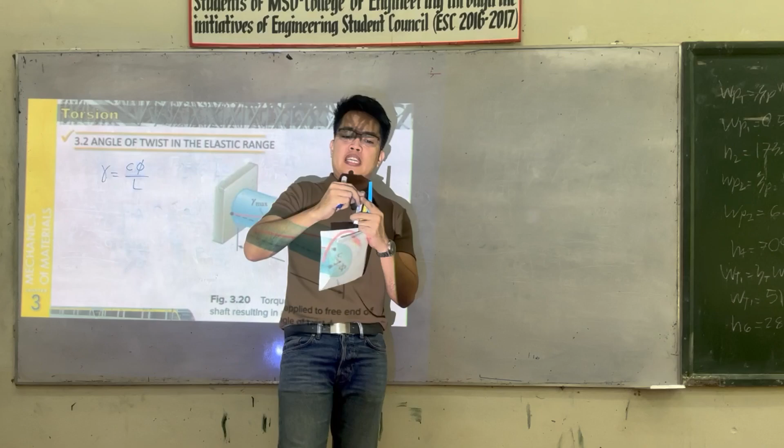Hindi siya lalabas sa proportional limit. Ibig sabihin, meron pa siyang straight line, proportional. Angular twist is just summation of TL over JG. Pag-apply ko ng torque dito, ito siya ay nabuo. Kung ito siya ay unmatched o nakadetach, ano yung pag-twist ko sa taas, ganoon din yung pag-twist dito sa baba. Kanina, problem sir, yung gamitin mong TO ay 560 para hindi lumagpas ng 8,000. Sabi din ng isa, sir, yung gamitin mong TO ay 660 para hindi lumagpas ng 8,000. So ano yung pipiliin mong TO, this one or this one?

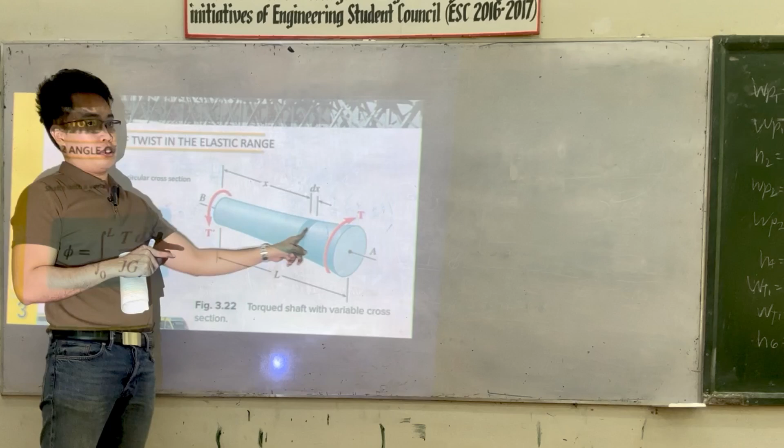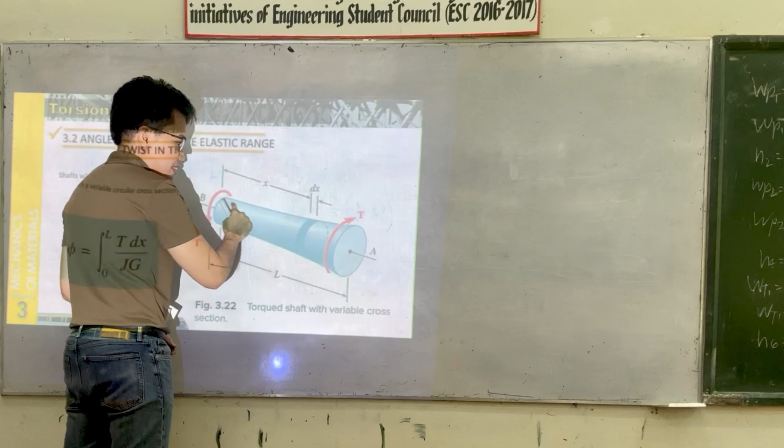Angle of twist in the elastic range. Sample problem 3.3. So far, yung binigay natin na example ay yung mga shaft natin ay circular at straight. Now, paano kung yung shaft natin ay function of x? Kung lalaki nang lalaki yung x natin, somehow yung radius natin dito ay function ng x natin.

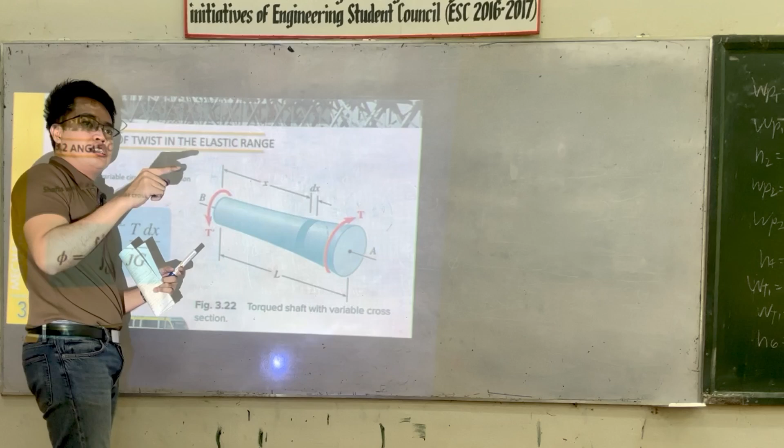So ano yung ginagawa natin dito? Kinakat natin siya into strips. At yung strips natin, instead of TL over JG, yung L natin, instead of length, magiging dx. So yung formula natin magiging T dx over JG. Pero take note, yung J natin dito ay function of x.

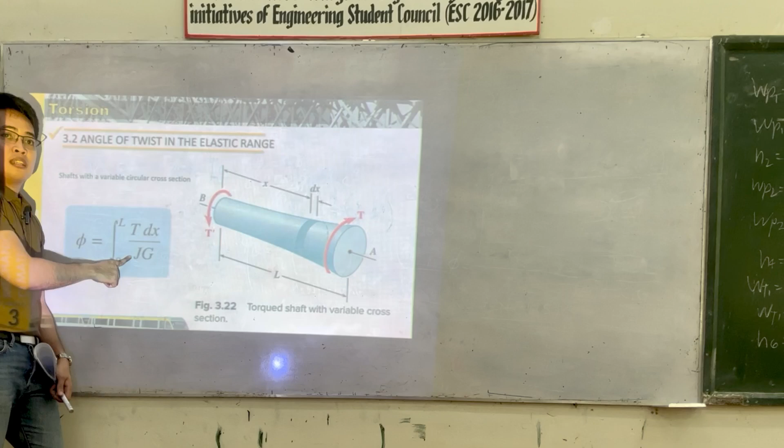Kasi yung J natin dito, ano yung formula? We have pi over 2 times the fourth of the radius, na yung radius natin ay changing with respect sa x natin. So if radius is a function of x, at yung J natin ay function ng radius natin, therefore J is a function of x. So this J here is not constant, it's a function of x. Kung ito ay function of x, hindi natin yan pwedeng mapalabas.

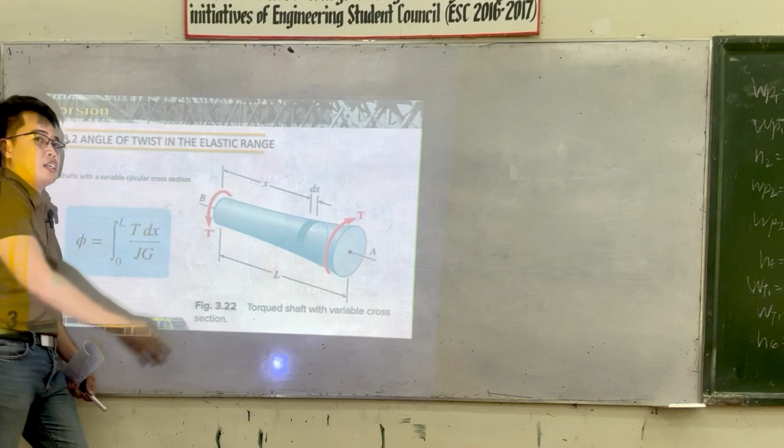So ayan lang, sa mga problems na involving integration, parang math lang ito. Given ka ng function, substitute mo dito, i-integrate mo. Parang math lang ito, calculus. Wala naman halos application yung integration na ganito yung mga shape ng shaft natin. Most of the shaft in real life is straight, so doon tayo mag-focus, sa straight, kasi itong isa ay mas math.

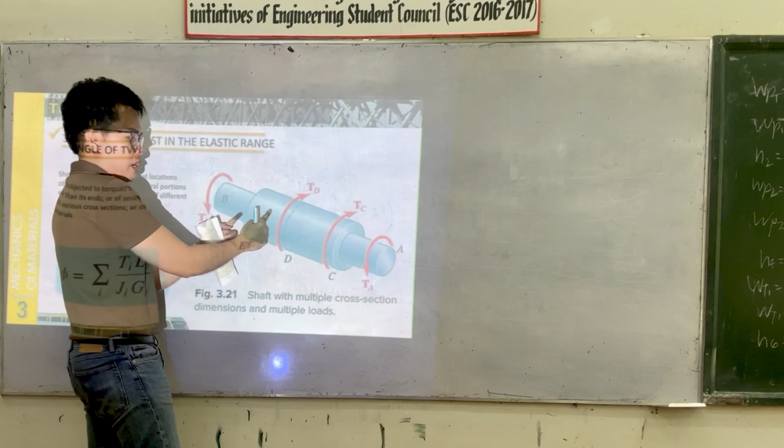Paano mag-integrate? So dito tayo, instead of continuous na graph, let's have it discrete. Paano kung yung shaft mo ay iba-iba yung diameters nila, at merong mga torques of different magnitude applied at different points? Ano yung gagawin mo? If you are asked, what is the angle of twist, if this one here is fixed, tinwist natin, ito yung mga torque na involved. Ano yung angle of twist at the very end? Ano yung gagawin mo? Kung ano yung nakuha mong angle of twist dito, plus yung makuha mong angle of twist dito, plus angle of twist dito, plus angle of twist dito, yan yung angle of twist at the end.

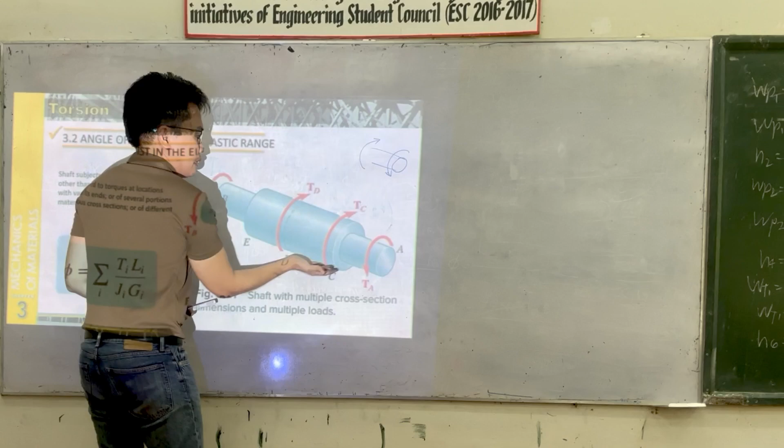Pero take note, yung angle of twist ay hindi always positive. Dito, halimbawa, ito siya, pinutol ko. May torque ako na papunta dyan, so yung internal torque ko dito ay papunta doon. Yung internal torque ko, using right hand rule, kapag ganito, pointing papunta doon, it's negative. Pero kapag ganito yung internal torque mo, papunta doon, positive x-axis, positive. So ayan lang, the angle of twist at the very end ng shaft natin ay just summation of TL over JG. Take note of the negative, right hand rule - positive x-axis, positive yung TLJG; papunta doon, negative x-axis, negative yung TLJG.

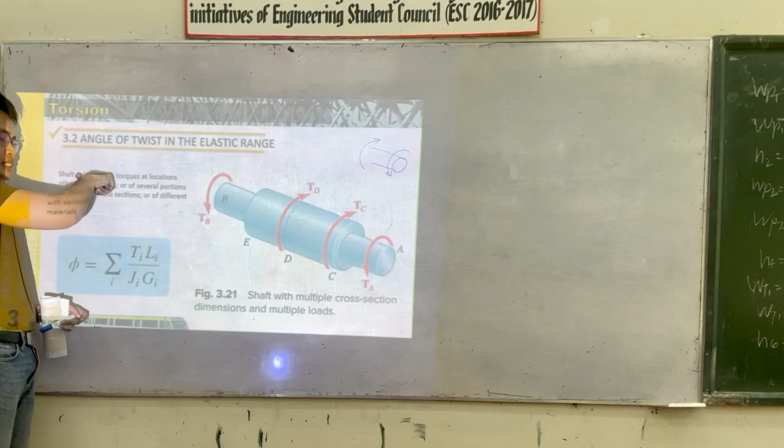Okay? Let's have an example.

Now, what does it say here? We have a horizontal shaft AD wherein AB, and at portion DC, we have a hole drilled. So from D to C, we have hollow. C to B, the same outer diameter, but this one is solid. And then B to A, the diameter is reduced, also solid.

We have applied torque at different points. Now the question is, what is being asked? Determine the angle of twist at end A. What is the angle of twist here?

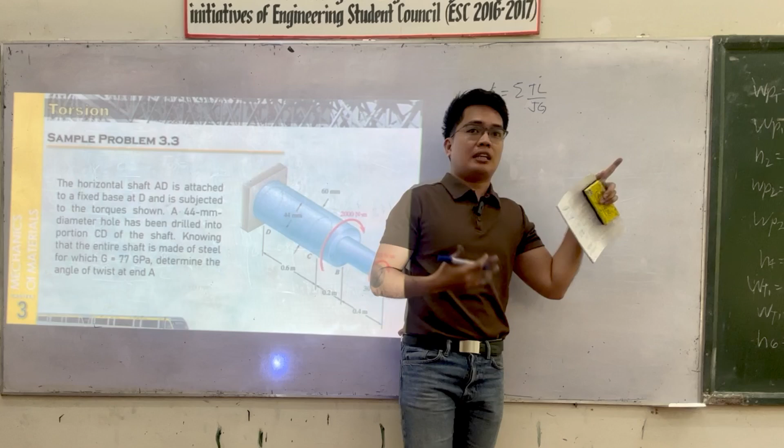So what's the formula? Angle of twist is just the summation of TL over JG. Now, G is related to material - it's a material property. So if you didn't change the material here, G will remain the same, so we can factor it out. So this becomes 1 over G.

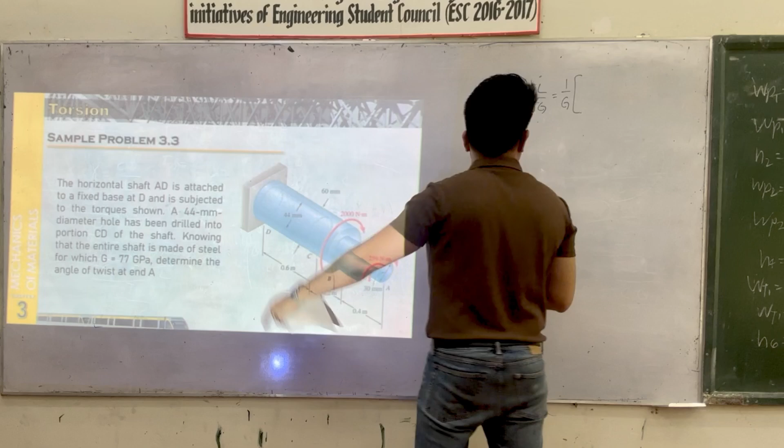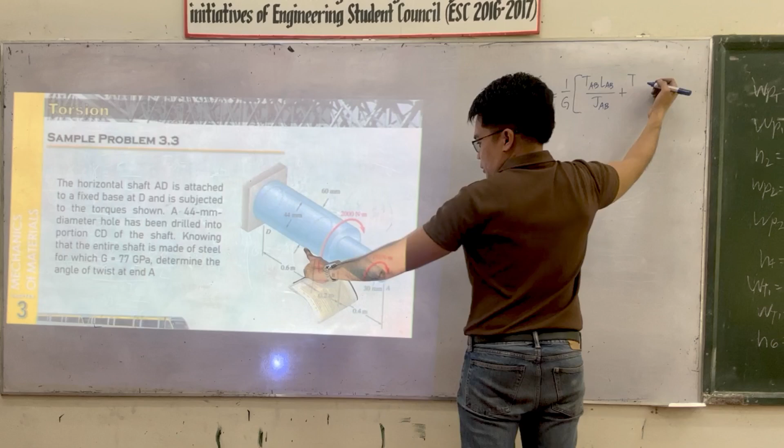Now we have TL over J, from AB, BC, CD. So let's write: T from A to B times L(AB) over J(AB), plus T from B to C, L(BC) over J(BC), plus T from C to D, L(CD) over J(CD).

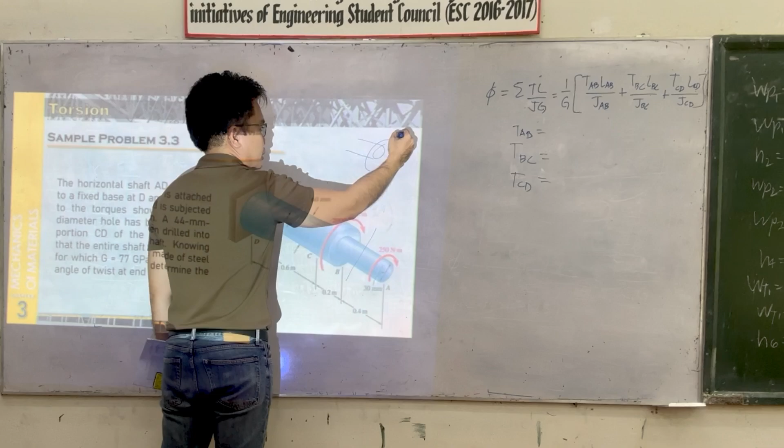Let's write torque AB, torque BC, and torque CD. How do we get torque AB? Let's cut here. So when we cut, if we have a torque going that way, which is 250, what's the torque here? Positive 250. So this one here is positive 250, unit is Newton-meter.

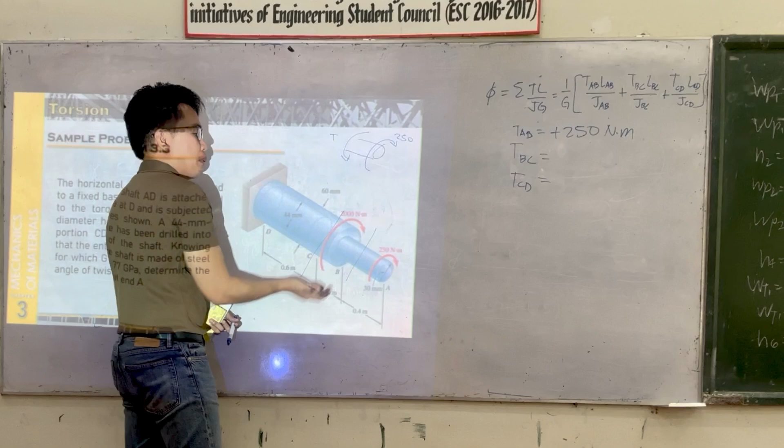How about this one? We're still in the solid section. What's the torque? Mentally, what's the torque? Positive. Very simple, we just add the two together, same direction. So the result is positive 2,250 Newton-meter.

How about the third portion? Here, it's still the same. 2,250 Newton-meter. Okay, the same. How about J?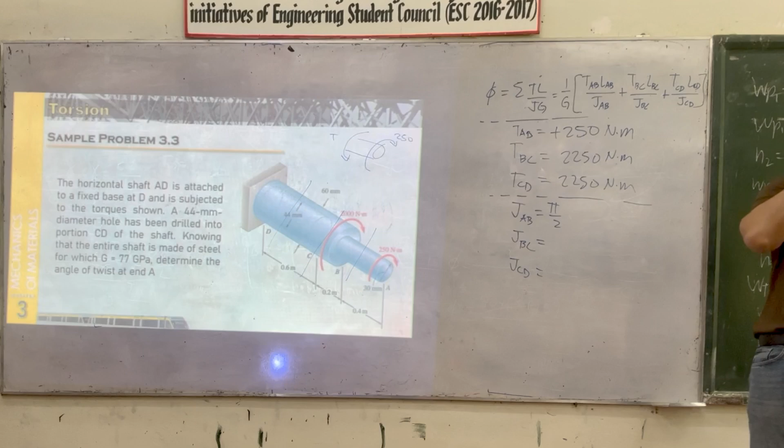J(AB), J(BC), and J(CD). This one here is solid. What's the formula? Pi over 2 times... what's C? We need to calculate it. 0.015, engineering style, just divide this. 0.015 to the 4th power. How about J(BC)?

This is pi over 2, this one is 0.03 to the 4th power. Lastly, pi over 2 times, since this is hollow now. So what's the radius? 0.03 to the 4th minus 0.022 to the 4th.

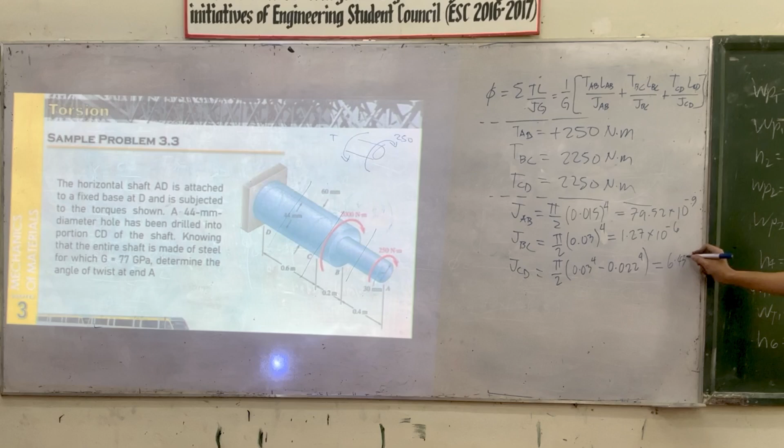Let's calculate this. 79.52 times 10 to the negative 9. Okay, how about this one? Let's calculate it too, just check if there's a negative 6. And then lastly, 6.433 times 10 to the negative 9. So that's it, okay.

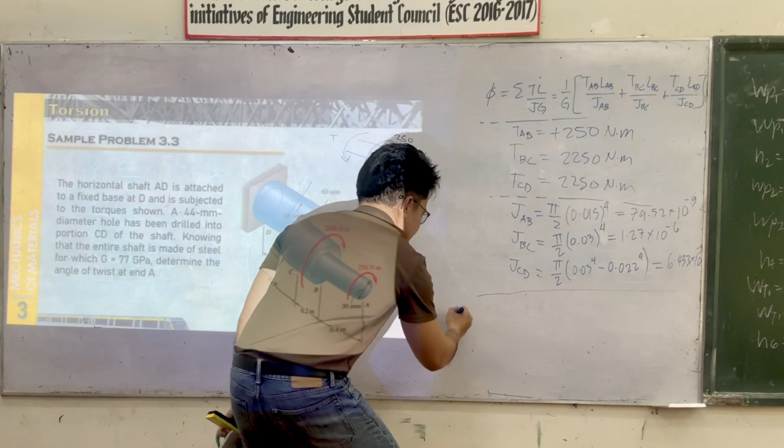We're complete with the given values now. So let's just substitute, very easy right? We have 1 over, what's G? 77, we have 77 times 10 to the 9. Times, let's do the first one.

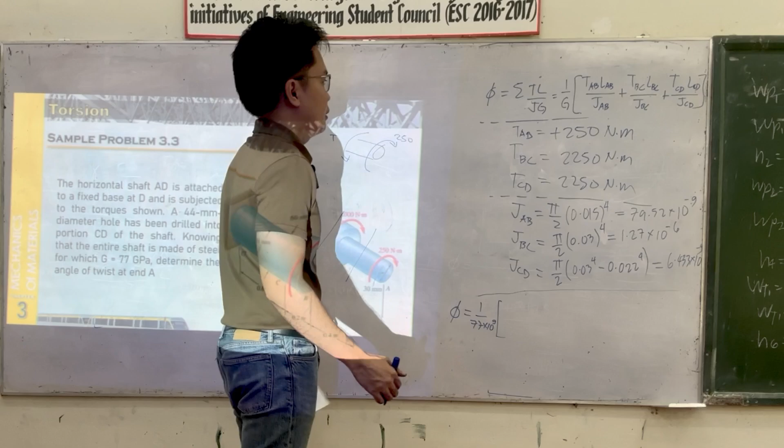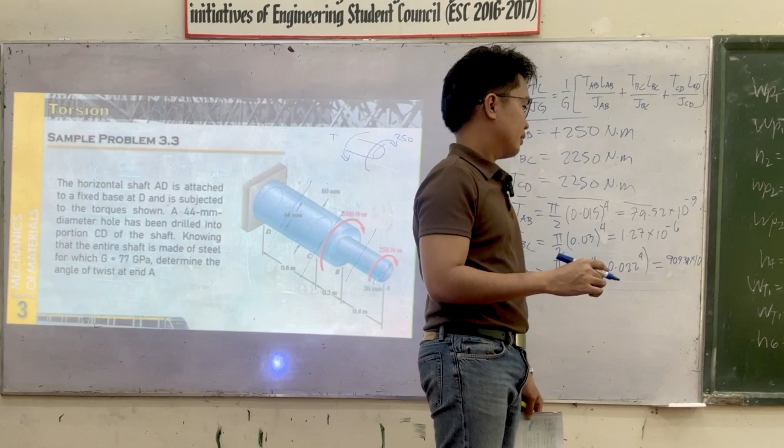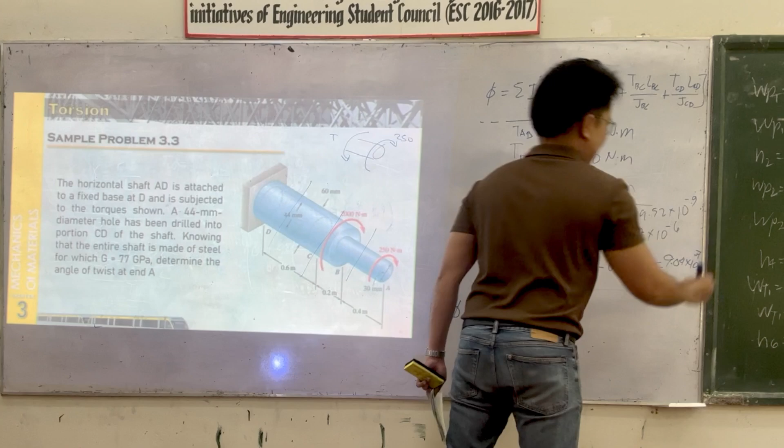904.38 negative 9. Negative 7? Negative 7, 904 negative 7. Is that right? 9.04 times 10 to the negative 7. Okay, good.

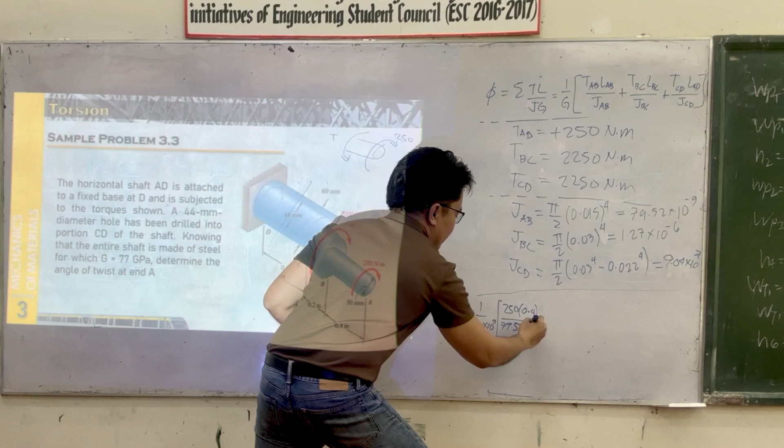Okay, let's substitute now. So this one here, T(AB) is 250, the length is 0.4 divided by J(AB), which is... times 10 to the negative 9. And then, what do we say? Still positive, right? Because all the torques point the same direction, so everything is positive.

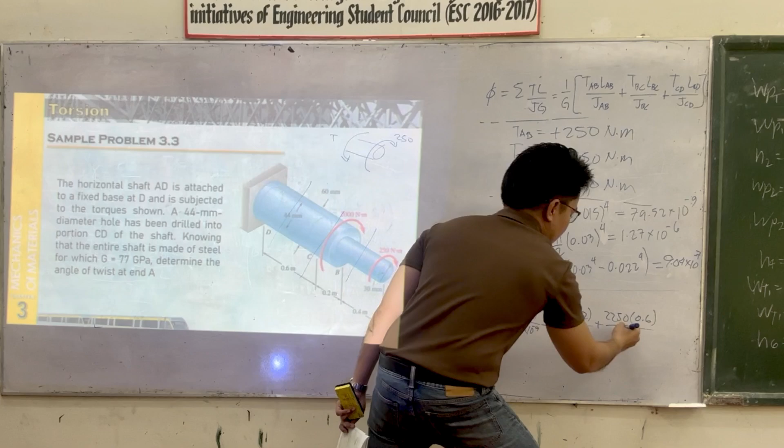So this one, 2250 times the length which is 0.2, divided by J which is 1.27 times 10 to the negative 6. Plus lastly, 2250 times the length which is 0.6, divided by J which is 9.04 times 10 to the negative 7. So let's calculate this, we get phi equal to 0.0403 radians.